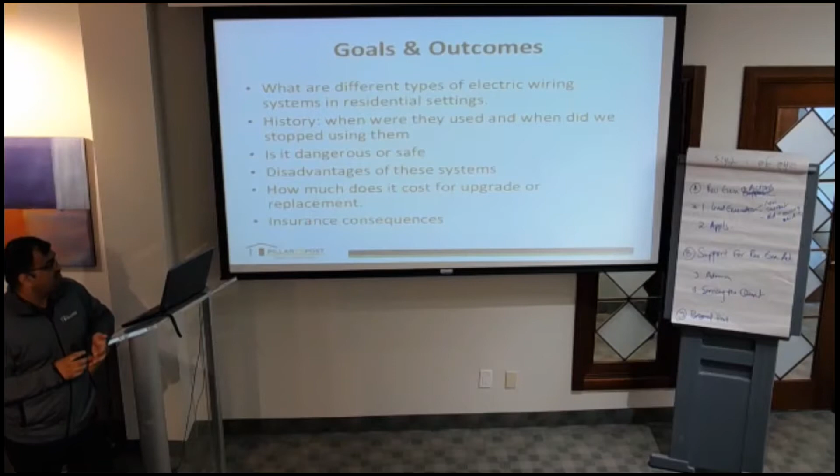The goals and outcomes are also mentioned on one of the sheets in front of you. These are the things we are going to cover today: we are going to talk about different types of electric wiring, dig a little into the history of wiring, the different types, which one is safe, what are the insurance consequences of them, and what are some of the disadvantages of different systems. I will also try to touch on the cost of upgrade, replacement, or maintenance.

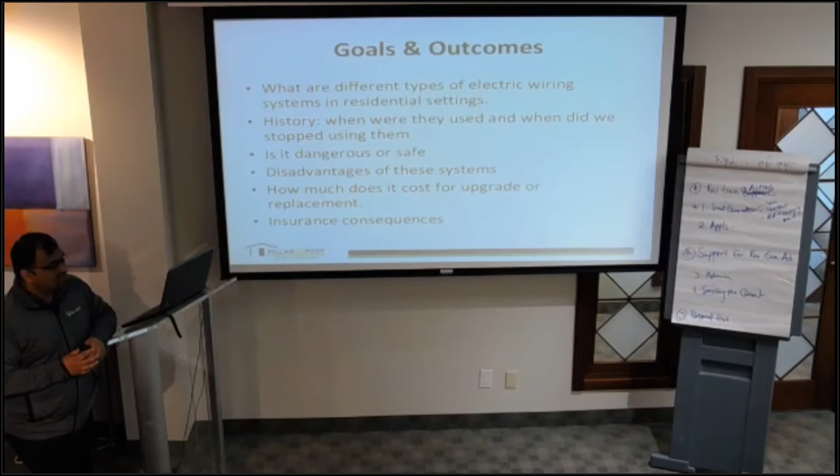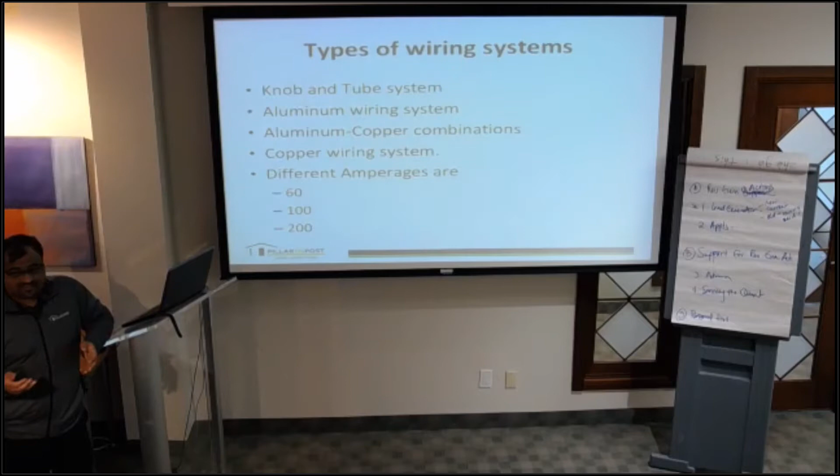So typically in a residential setting, we have knob and tube systems, we'll go into detail about that. We have aluminum wiring systems, and there's a combination of aluminum and copper, we'll talk about why that is dangerous as well. The copper wiring system is probably the best system available out there, and about 70% of the homes in and around this area have copper wiring. That is the new norm, what most new constructions have. Different amperages are 60, 100, 200. 60 is usually with knob and tube, and I've seen it in some copper wiring too, but mostly in subdivision homes it's either 100 or 200.

So, knob and tube wiring. It's an old system, and that was a standardized method of electrical wiring. If you ever happen to see a century home, you are more than likely to see knob and tube wiring in there. That may have been upgraded to copper wiring and a breaker panel, but it doesn't mean it has been. There are a lot of things to look for, especially when you go into a century home.

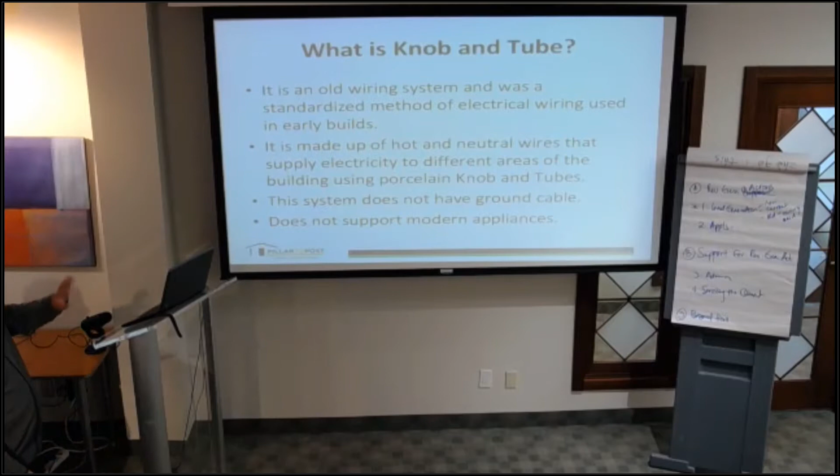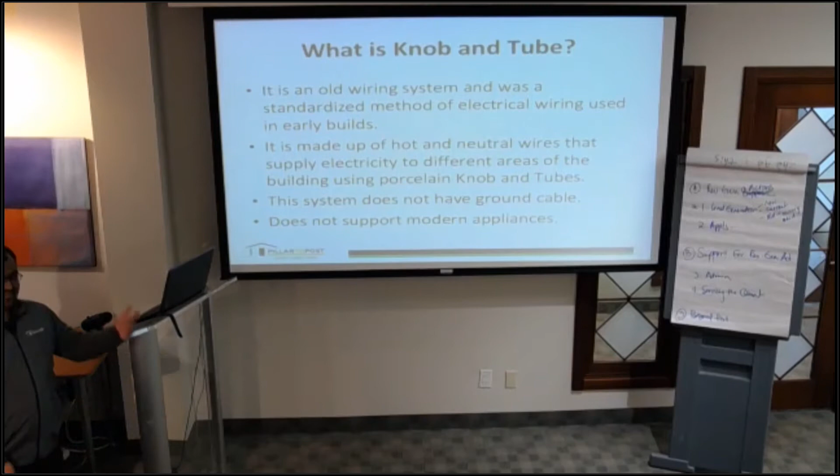This wiring system is basically made up of two parallel open wires, hot and neutral, and they supply electricity to different areas of the house. Some of the issues with that system: number one, they do not have a ground cable, so there is no grounding, which obviously is a problem. And that system does not support modern appliances, so if you have TVs like the new flat screen TVs, printers, or other modern appliances, this system is not going to support that.

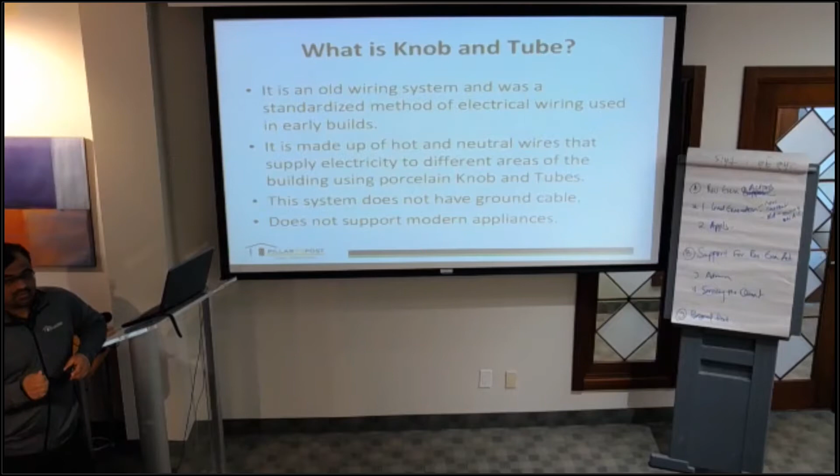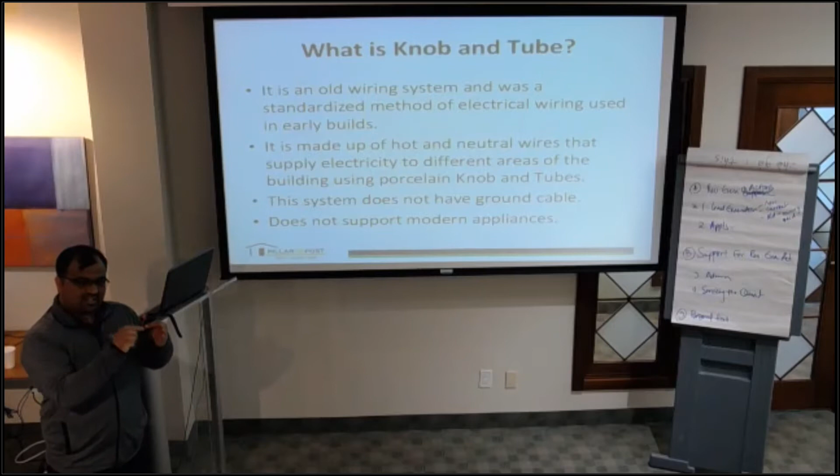So even if you plug in a printer, it doesn't work? Anything that has a grounding cable will not work with this system. If the plug has three prongs, then it's not going to work. If it has two prongs, or if somehow you could get rid of the grounding cable and plug in two prongs, yes it would work, but it's risky.

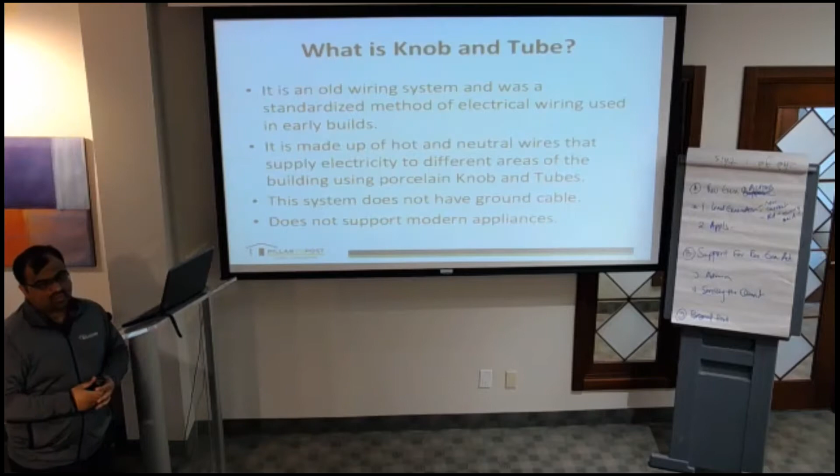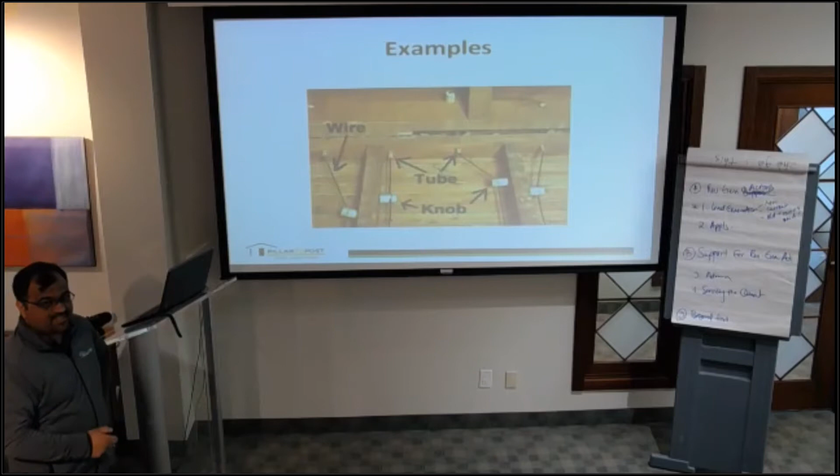All right, so these are some of the examples, you can see them over here. These are the knobs, and these are the tubes. The knob basically takes the wire along the length of the floor joists, whereas the tubes cut through the joist and take the wire to the next segment. That's how they are wired, usually in the basement. If you go into a century home with an unfinished basement, you would see something like this.

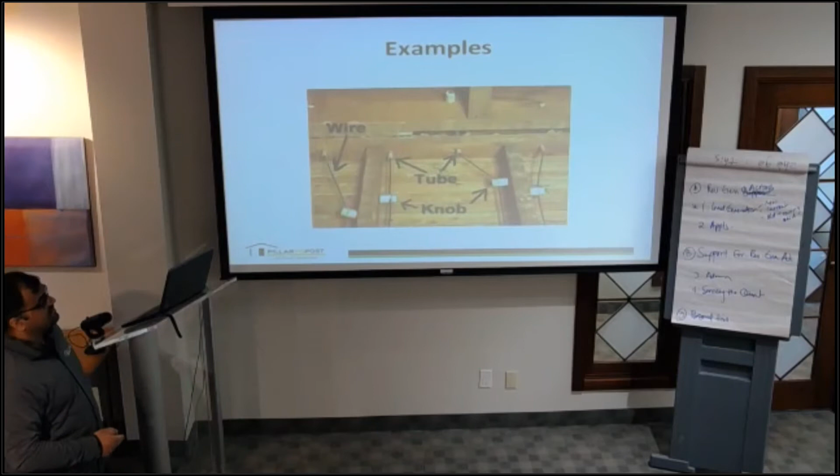This is knob and tube wiring, a typical example in an industrial setting. This is basically a farmhouse, and even now, knob and tube wiring is very common in farmhouses and big sheds, because this is very cheap to do. That's why they do it, and it's very easy to maintain as well.

So what's the maximum amperage for knob and tube? Usually 60, not more than that. I haven't seen any at 100, so it's usually 60.

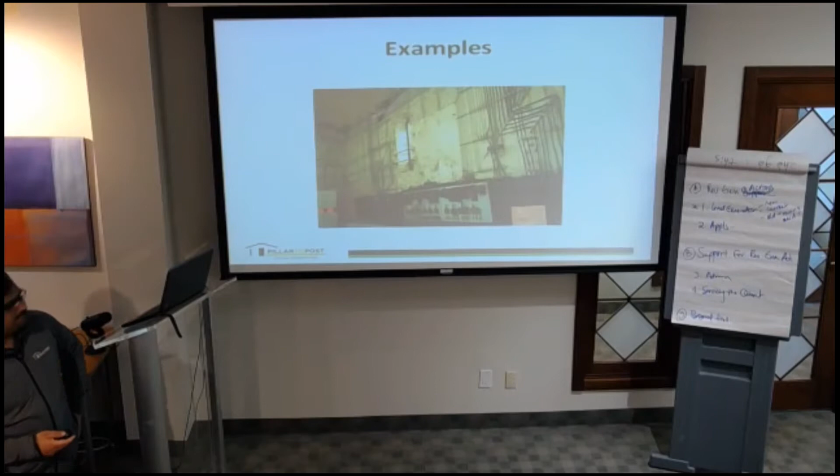So this is another example. Like I was saying, these are the knobs that connect the wires, and these are the tubes that go through the floor joists, and that's how they supply electricity to the whole house. This is a hot wire, this is a neutral wire, and this is the connection. So it was a very simple system.

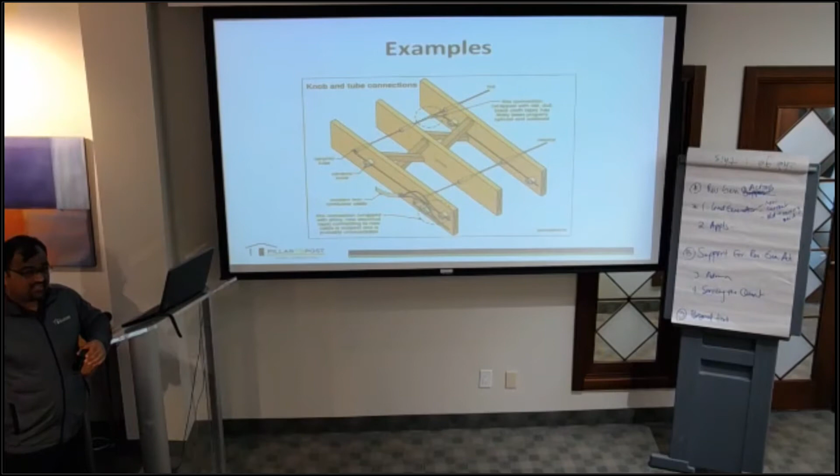It was very easy to maintain, but it was back in those days when there wasn't much requirement of power. It was usually just one receptacle per room.

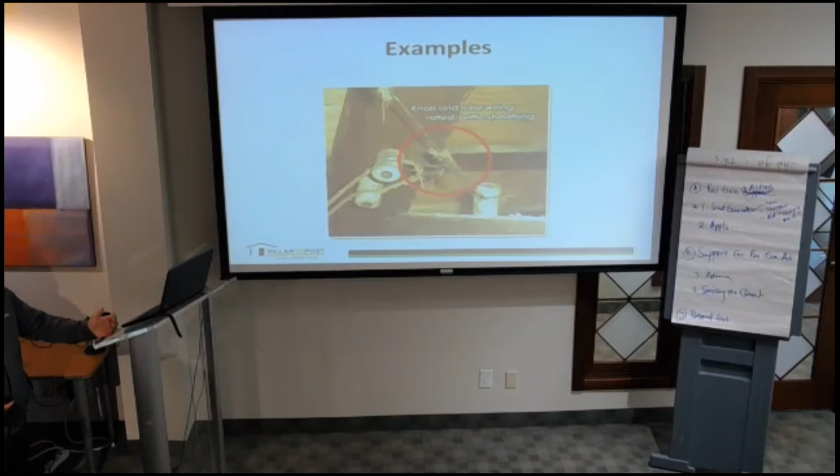So this is another example. Somebody has tried to use tape to cover the live wire, which is never a good idea to do, because this can trigger a fire right away.

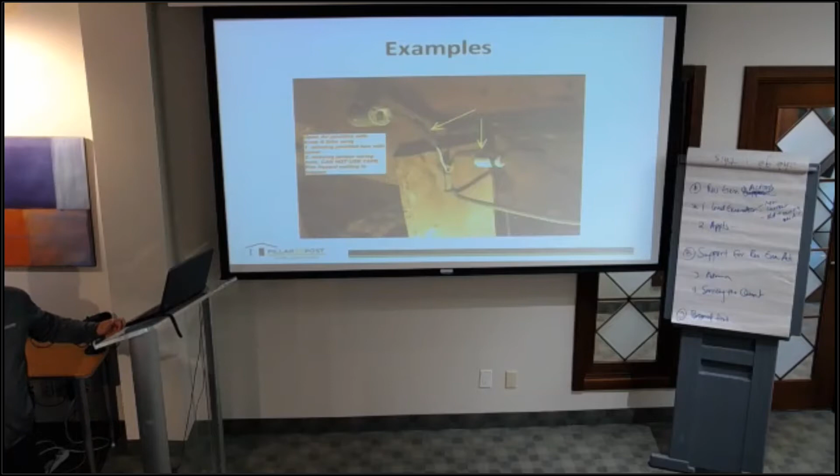But some tapes are electrical tapes. Electrical tape is different, you can use electrical tape, but it's not recommended, plus it's only the electrician's job to use electrical tape. But if you use plastic tape or duct tape, no, absolutely no.

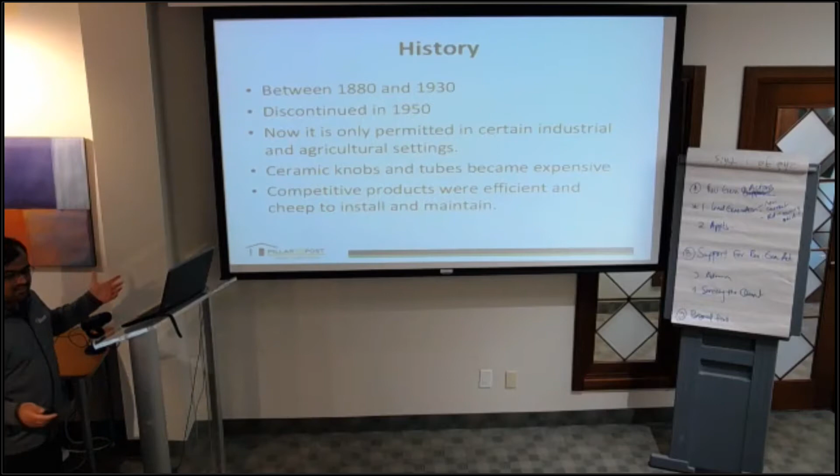So a little bit about the history of knob and tube. It was used between 1880 and 1930, and it was discontinued in 1950. So that is usually the time frame. If you go into a house which was built in the 1930s, 40s, or 20s, you would see knob and tube wiring.

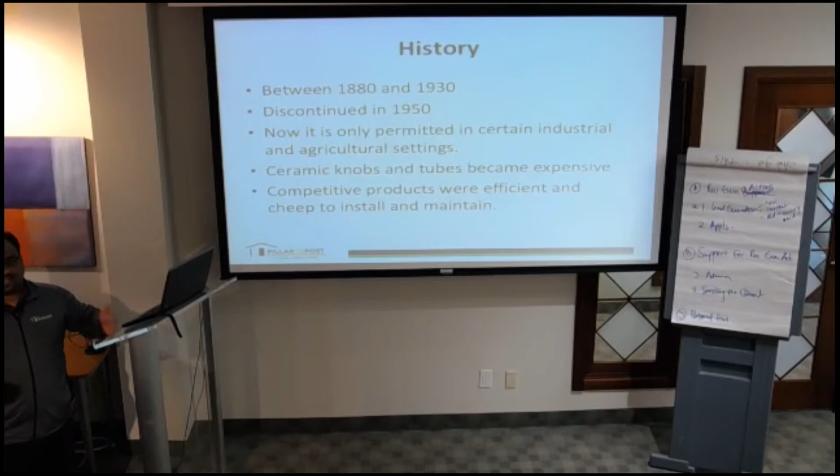You can go into the basement and see those knobs and tubes hanging around. Even if the house has been upgraded to a breaker panel and aluminum wiring, you would still see some knobs and tubes because they are embedded into the floor joists, so they are easy to see. But if you see that situation, you know the house has been upgraded, and you can get the certificate and all those things.

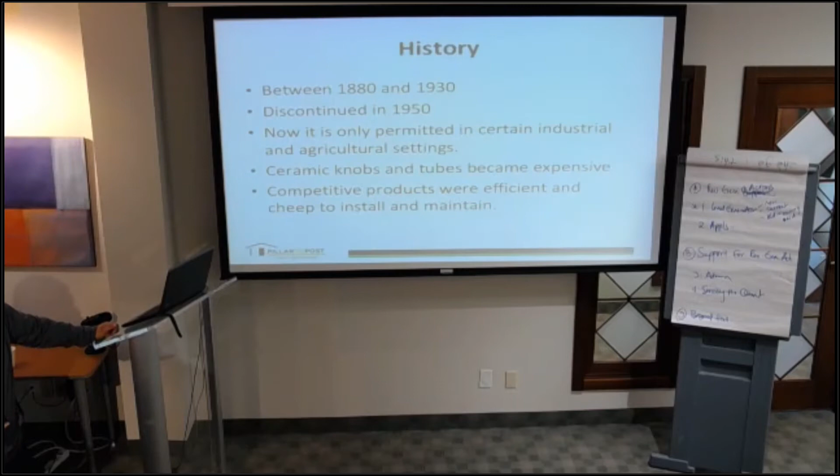It is only permitted in certain industrial and agricultural settings. It's very difficult and very expensive to maintain. Those ceramic knobs and tubes are very expensive, and that's why they were phased out and are not in use anymore. The competitive products were very readily available, cheap to maintain and install, plus electricians prefer something that is safe.

So some of the disadvantages of the system: they do not have a safety ground, the grounding cable, and it can get damaged during building renovations.

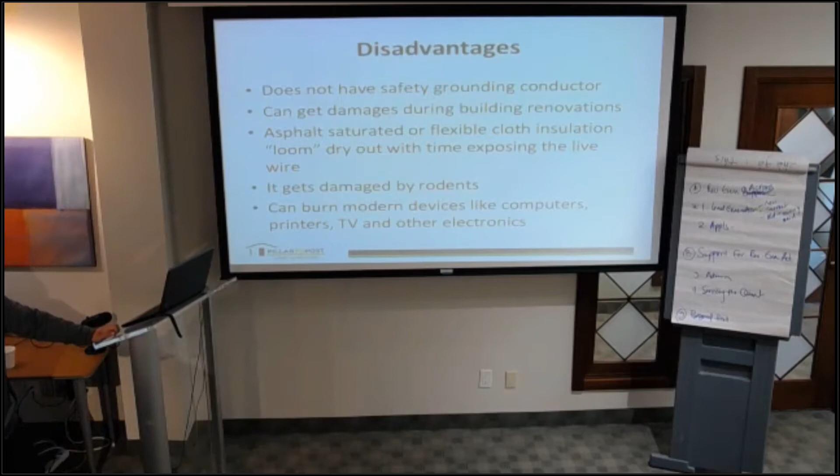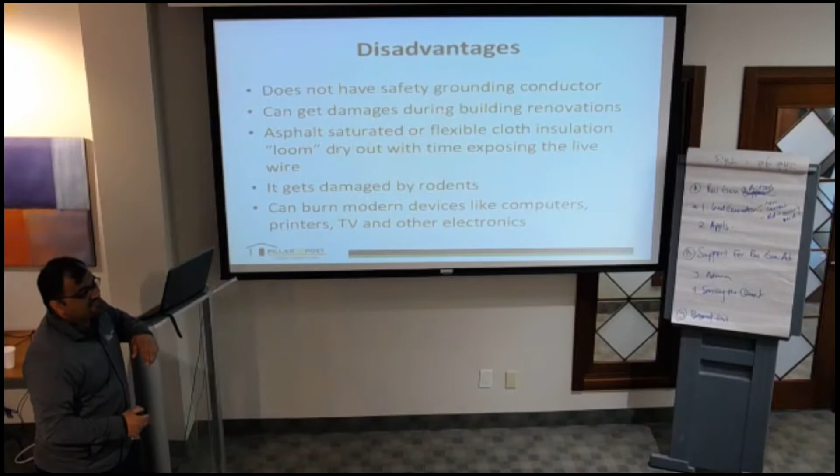It gets damaged by rodents, so that's another issue. And like I said, modern appliances like computers, TVs, and printers are not supported by this system. The old homes have their own charms, but they have their limitations as well.

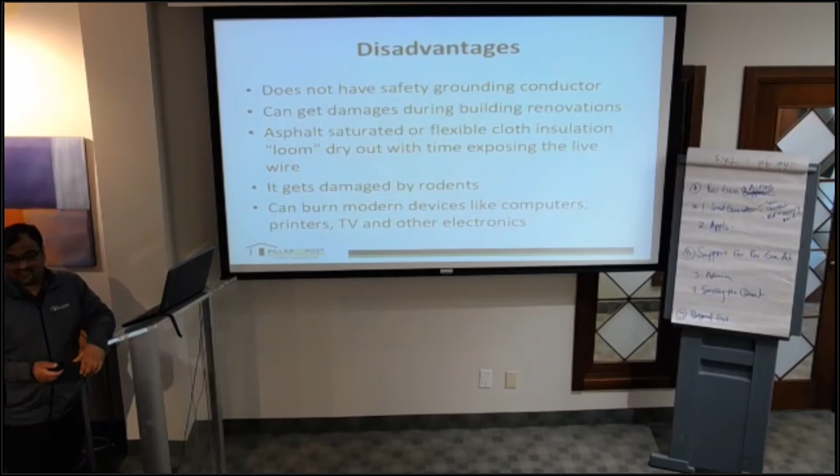Some of the other disadvantages are that there are only a few branch circuits, fewer than needed. If you go to old homes, you would only see one receptacle per room. But now in modern homes, you see like 10 receptacles in one room because you need more power on almost every corner: cell phones to charge, printers, computers, and whatnot.

One of the things that is probably the biggest disadvantage is the magnetic field that it creates inside the house. The live wire, if it is not covered properly with insulation, can create a magnetic field, which is not good for our health.

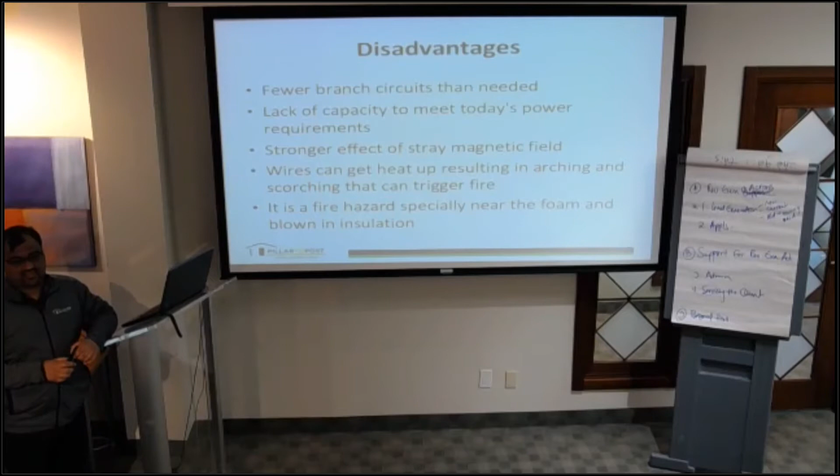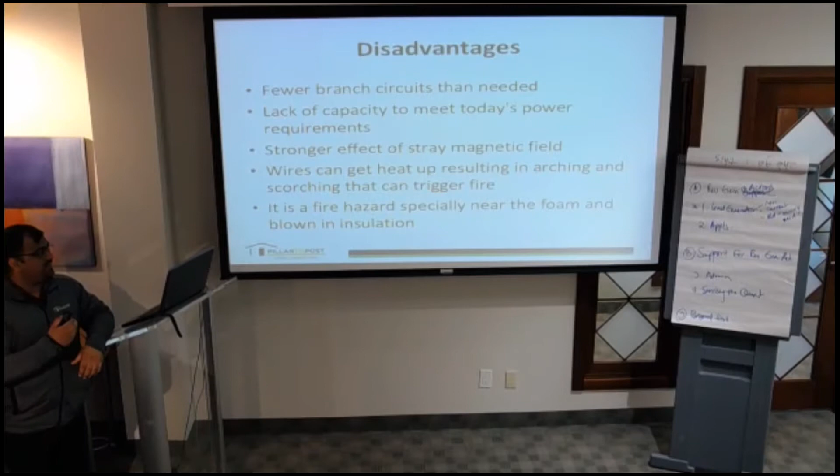A lot of people talk about these electromagnetic fields, especially if their homes are located where there are live wires, like heavy duty wires going in the backyard. A lot of people ask me these questions, if those wires have any issues or if there are any health consequences of those magnetic fields. So yeah, I mean this is something that you have in your house, so yeah, it has direct consequences.

It is a fire hazard, especially near the foam and blown-in insulation. So that's the issue that we see today. The insulation is usually blown in, and if you have knob and tube wiring running through your attic, then that can trigger a fire. It's a fire hazard.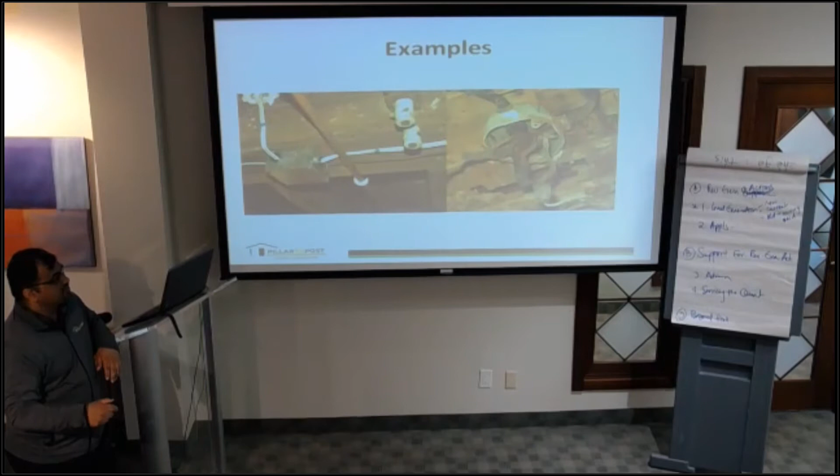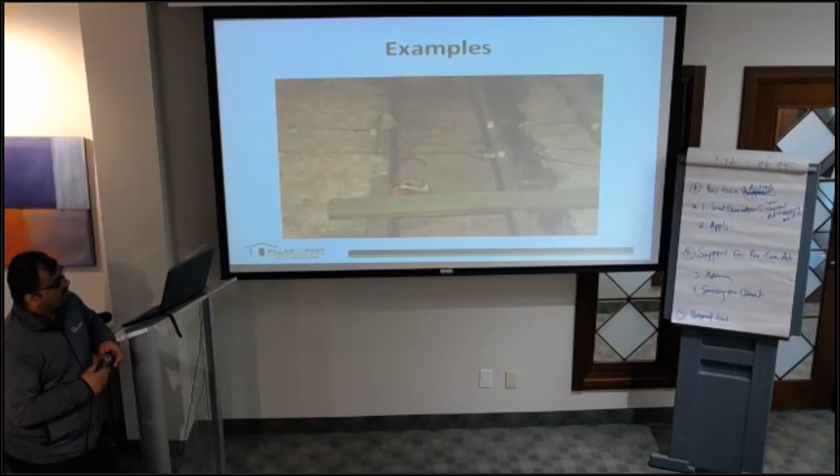This is what I was talking about when you have blown-in insulation in the attic and you have live wires running through it. This is a disaster waiting to happen. Is it asbestos? No, it's not asbestos. It's a blown-in fiberglass insulation.

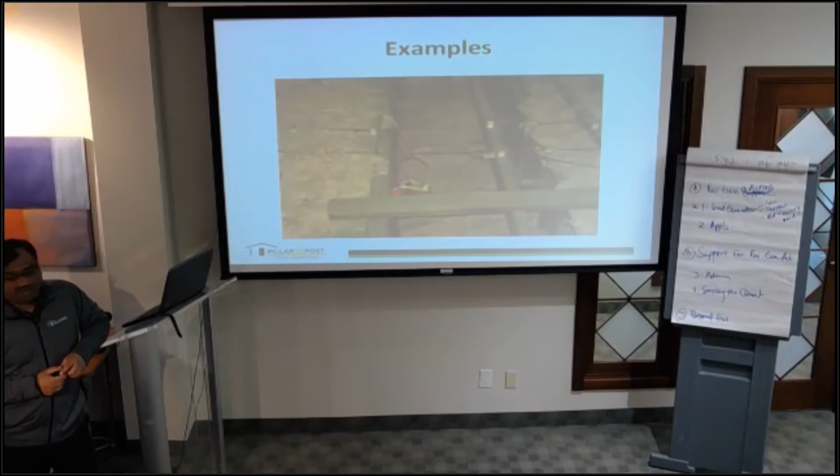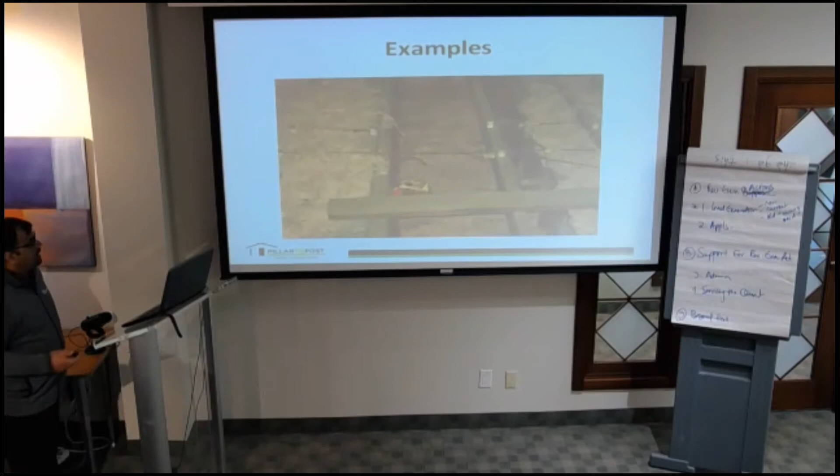That's good, let's dig into the cost of replacement. It's usually around $10,000 to $15,000 for a 2,000 square foot home. Century homes are usually bigger, so the cost usually runs into $20,000 to $30,000, and that is the replacement of the whole system from knob and tube to aluminum wiring. So they basically run new wires, they have to install a new panel, and obviously the branch circuit wiring is something that they also have to do because of the new wiring.

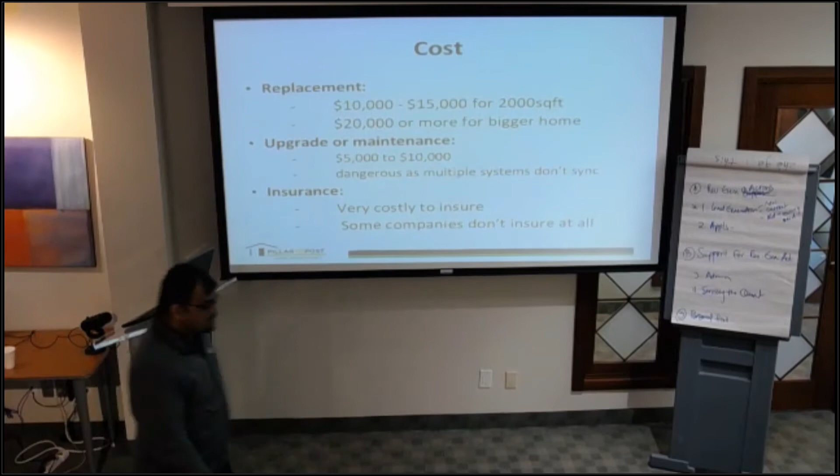So is that including disposal of the old system, or only replacement? It's just a replacement, that should be $20,000. Correct, correct.

Something about the upgrade and maintenance. Sometimes I have seen in some homes that what people do is basically leave the knob and tube as is, and they add a layer of aluminum wiring on top of it. So some of the bedrooms, for example, will get aluminum wiring, while the basement still has knob and tube. So that's like an overlap of different systems. Now that is very dangerous to do, because these systems usually do not sync. So if people think that they have a partial upgrade to a new system, but that's really not the case, the bottleneck is still the knob and tube system that you have in the house. So if you are replacing, you have to replace the whole system. You should not do it in patches.

And as a realtor, if you go into a house and you see wires that are going through the floor joists, and you see a new panel and you see new wires as well, the first thing that should come to your mind is, is it a two-system overlap? Because that is usually dangerous. But if it has been removed properly and the new system has been put in place and the old wires have been taken off, then yes, that's an acceptable system.

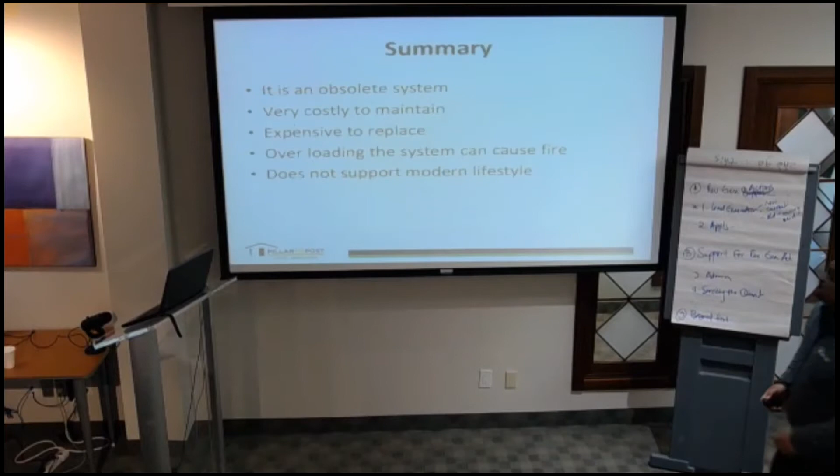So yeah, summary about knob and tube wiring. It's an obsolete system. It's very costly to maintain, expensive to replace. Overloading can cause the system to fail, and obviously can cause fire as well. And obviously this also doesn't support the modern lifestyle.

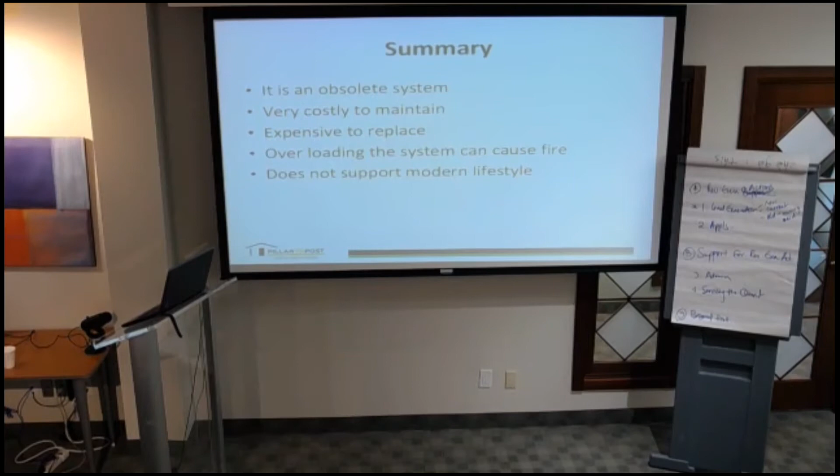How many of you have ever come across knob and tube? You said you have. Yeah. Downtown, there's like... Downtown, yeah, exactly. Anyone that's worked downtown, that's one thing you have to be careful about. Well, I have found quite a few of them actually up north as well. So the old homes, like the century homes, almost all of them have knob and tube wiring. Okay.

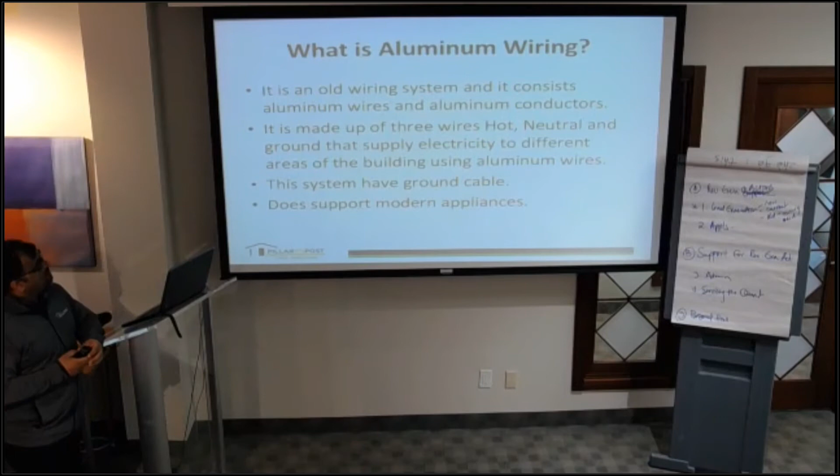So we are on time. Let's dig into the aluminum wiring. Okay, so this is also an old system, but it's still in use. You can still find aluminum wiring in many homes. So basically, the system consists of aluminum wires and aluminum conductors. They are made up of 3 wires: there's a hot, there is neutral, and then there is a ground cable. So it is obviously a better system. And the aluminum wires basically supply the electricity throughout the house. Now, like I said, this system is better than knob and tube because it has a grounding cable, and it does support the modern appliances.

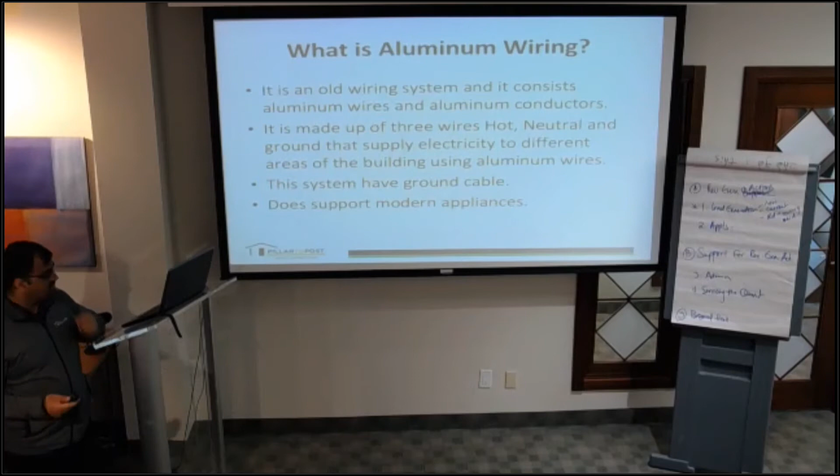However, this system also has a lot of limitations. Excuse me. But let's dig into the history a little bit, because we need to understand why this was put in place in the first place. So back in the 1960s and 70s, this is a system that was used at that time. And the reason for aluminum wiring was because copper was expensive.

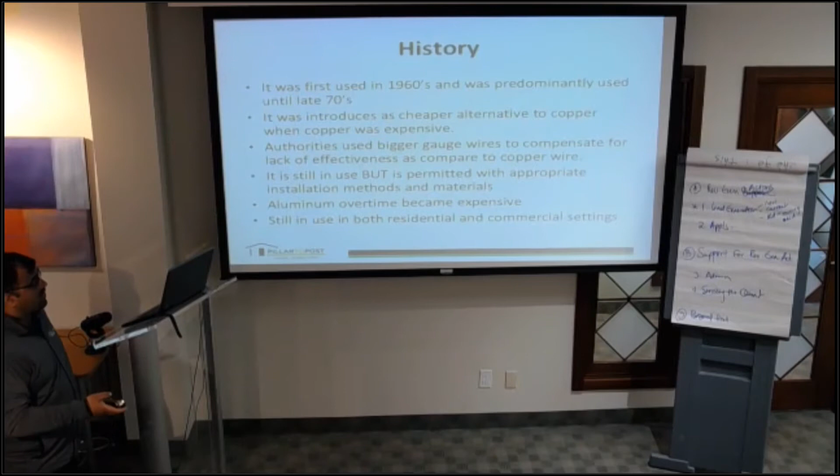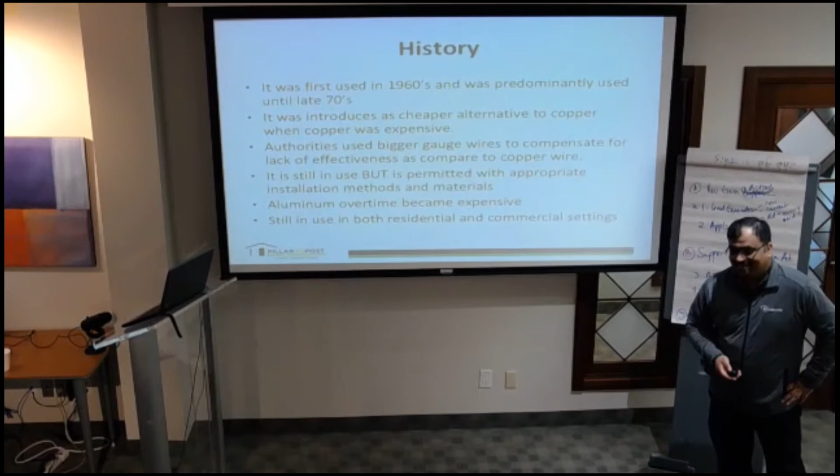From back in the day, from the early 1900s, all the electricians agree. Well, it's a proven fact that copper is a much better conductor of electricity than aluminum. But they had to replace it with something because copper was very expensive. So aluminum came out as a very nice alternative. And there were a few issues. For example, they had to use bigger gauge wires. So instead of using a 14 gauge wire, they had to use 12 or 10. Oh, by the way, 12 and 10 is a bigger gauge than 14. It's the other way around in gauges. And so they were trying to get the same effectiveness out of a bigger gauge wire.

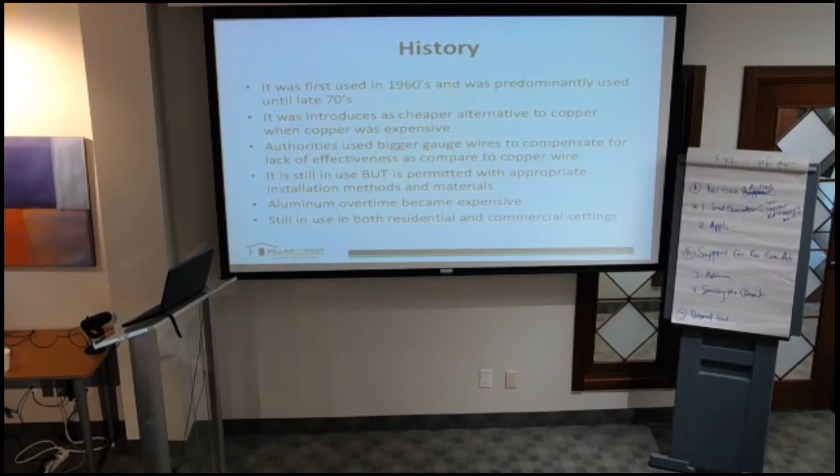It is still in use, but it's permitted with the appropriate installation methods and materials. So this is very important, and this is what we are going to talk about today. What are the installation methods that we have to follow, and what are the materials that have to be used in the aluminum wiring, because there are consequences. If they are not done properly, then obviously there are a lot of consequences: insurance, cost, a few other things that we're going to discuss.

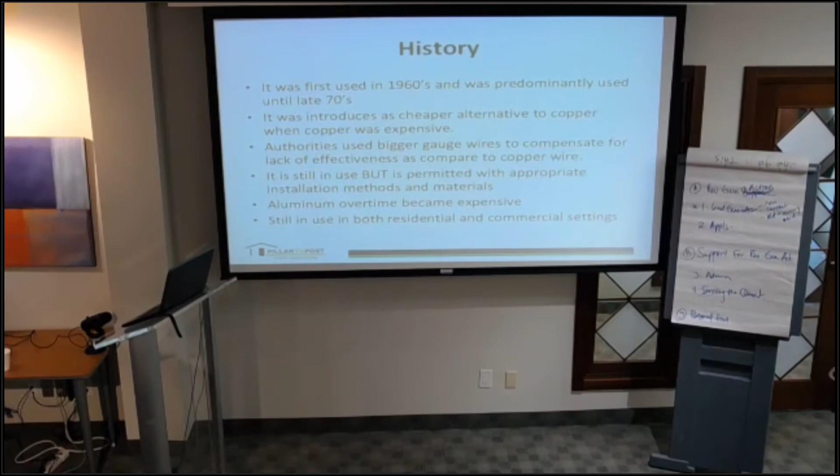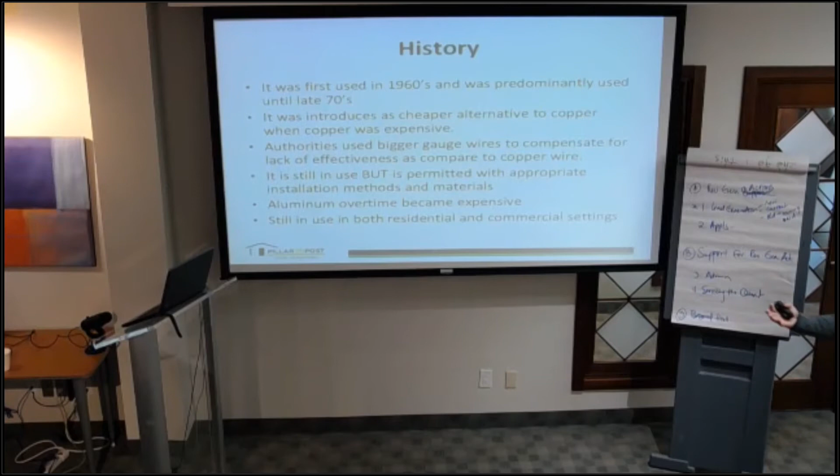A couple of other points. Aluminum over time became expensive, so we don't use that anymore. Well, sometimes we do, especially in commercial settings, because if you have to transport electricity from point A to point B, and point A and point B are far from each other, like the electrical hubs. So aluminum is an alternative which has already been installed. So instead of upgrading everything to copper, they just continue to use those aluminum wires that are stretched from one powerhouse to the other.

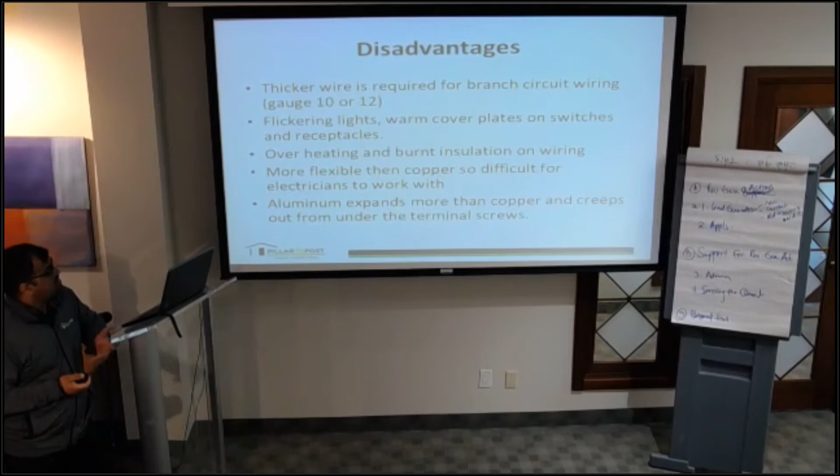So some of the disadvantages: like I said, we have to use a thicker wire, so it's usually 10 or 12. I will show you some examples as well. What does that mean? Usually the copper wire used in branch circuit wiring is 14 gauge. Over here, we have to use either 12 or 10. Flickering lights, warm cover plates on switches and receptacles. Now, these are the issues that started coming up in the early 70s.

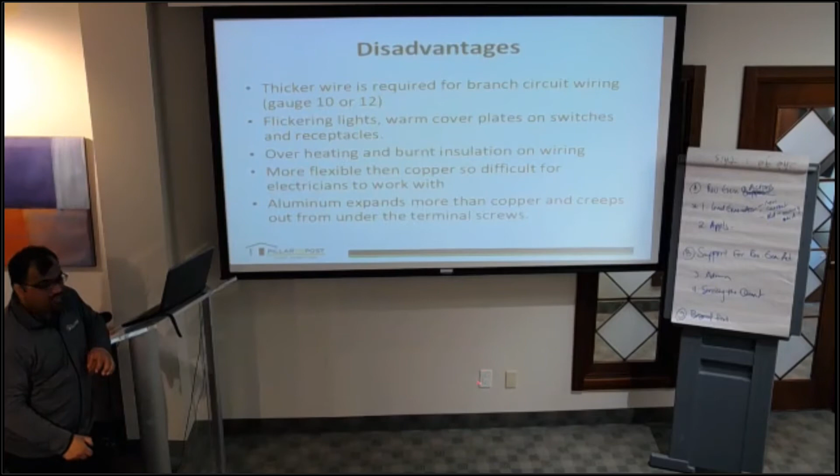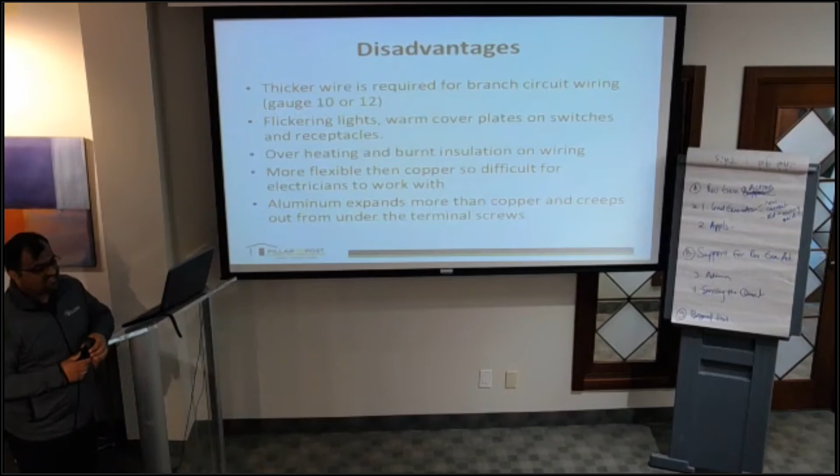When systems were overloaded, the consumer needed more power, and they started putting in... so for example, this receptacle that we have over here has 3 prongs, and you can plug in 2 things in it. But you may have seen a lot of people plugging in the 6 receptacle one. Which one? Yeah, this is an extension. So you use an extension, you use other things. So with these things, if it is aluminum wiring, it would heat up. Cause of fire. That can cause fire. Yes.

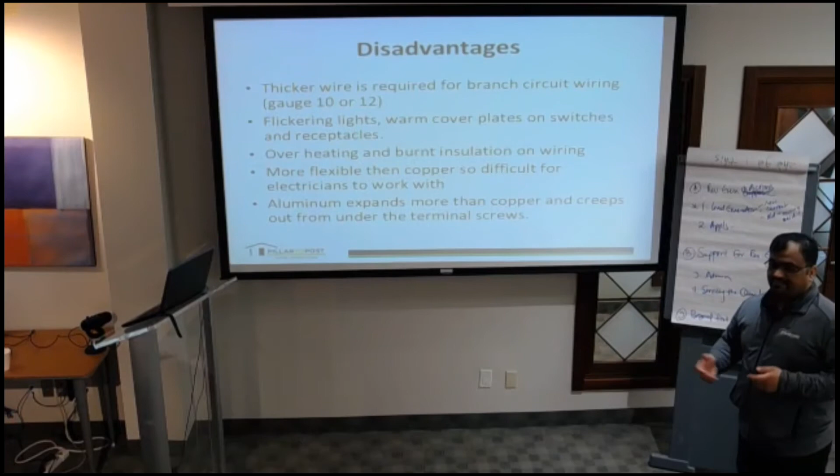So what are the flickering lights? Light flickering, like on and off. Okay. So is that because it was overheating and causing like a break in the circuit? Kind of, yes, I'm gonna talk about that. So aluminum expands, and that creates a little bit of gap at the connections. So the connection is not perfect, and that's why the electricity is not flowing as fluently as it should be, and the lack of amperage caused the flickering.

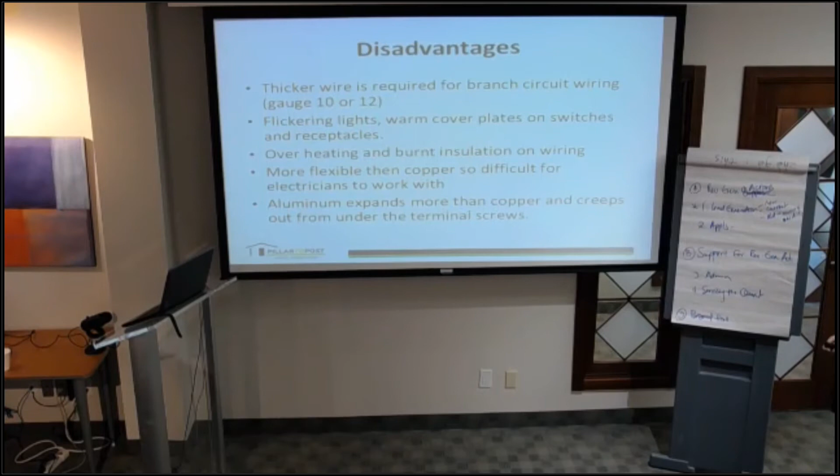So could that technically spark? It can cause a spark, yes. And I will show you some examples as well, what can happen. And that's the reason why it is not a good kind of wiring to have. Okay, some of the disadvantages is aluminum oxide, which is rust that develops over time, and that interferes with the flow of electricity. So that is one thing that also results in flickering lights.

The two system overlap, which is joining aluminum and copper wires, can result in much oxidation, and obviously the connection gets poor with time, and it can again cause fire. The electrolyte causes galvanic corrosion that results in unstable connections over time. So if you have an aluminum wire coming to this receptacle, for example, and this receptacle is made up of copper, these two materials do not match. I mean, they do, but over time there's a corrosion, and that would result in the lack of amperage.

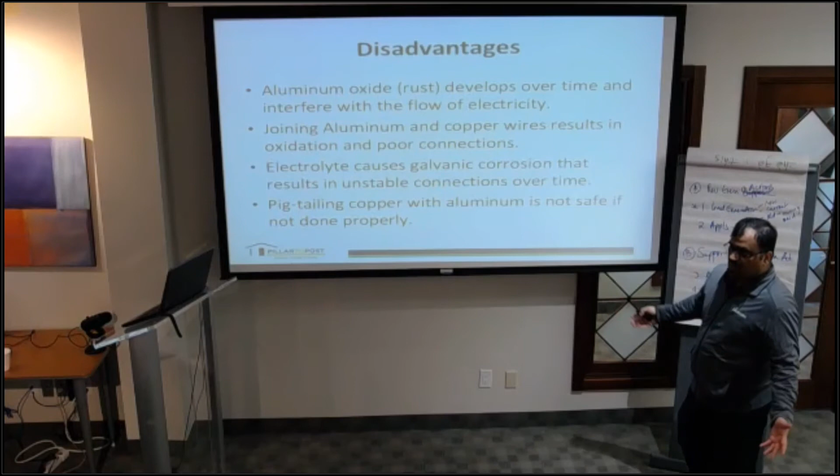So for example, this is designed for 15 amps, but over time you will not get 15, you will probably get 10 or maybe less, which means that you will not get the power which is required out of it. And eventually, if you overload that receptacle, it will become a hazard and can catch fire. One of the solutions that is done is called pigtailing, but some people start using copper and aluminum, which is obviously not safe to do if it's not done properly.

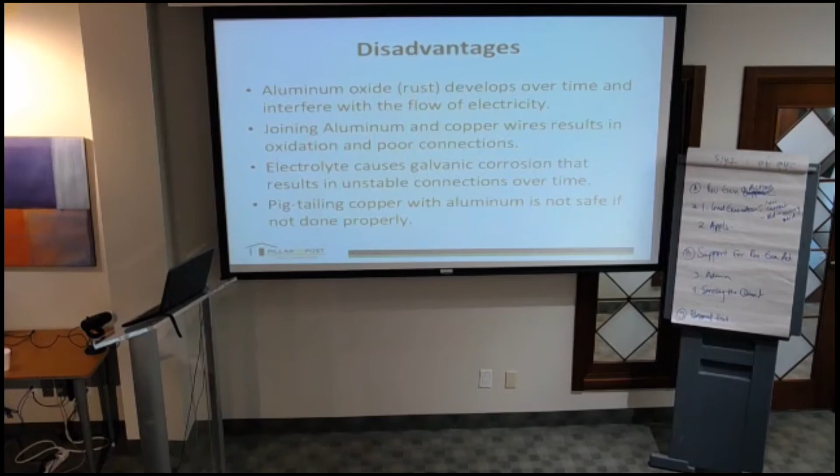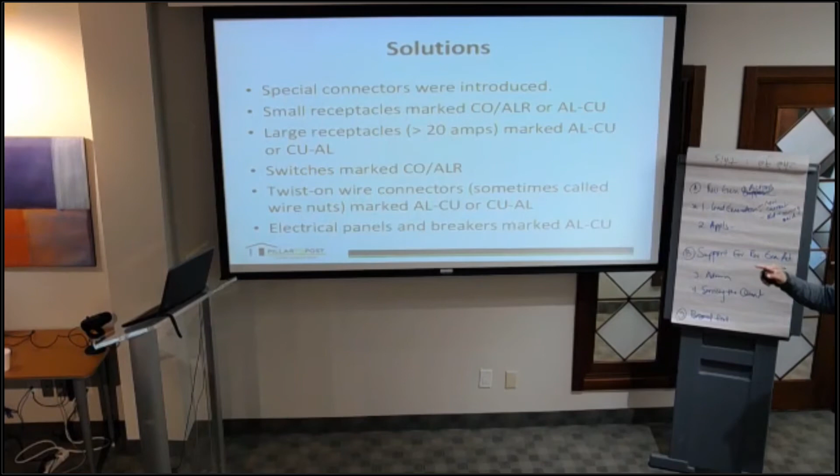Some twist-on wire connectors. They are also called wire nuts, and they are usually used for pigtailing, the term that we used in the previous slide. So that is a solution that electricians usually recommend if you have aluminum wiring in the house. But I would not go into the detail of that. It's a very technical thing to discuss. But from a realtor point of view, all you need to look for is anything that is marked with these signs. So if you see those, it means that there is either an aluminum copper combination or just aluminum inside the house.

Yes. You have a question? So that would be a safer situation. Correct. And you'd be more likely to be able to get insurance. Correct. Well, for insurance, there are some more requirements. I'm going to talk about that in the next slide. So there are a few more requirements that you have to do to get the insurance. Where do you see it on the switch? Oh, I have examples. I'll show you.

Another thing to look for is the electrical panel. So if you are going into a house with your client, you happen to go into the basement and have a look at the panel. If it is exposed, then you can see the breakers will be marked with ALCU. So that way you know that it's an aluminum copper combination. So those are the things to look for as a realtor. So what will it say if it's not a combination? If it's just copper, it won't say anything. Yeah, it will not be marked.

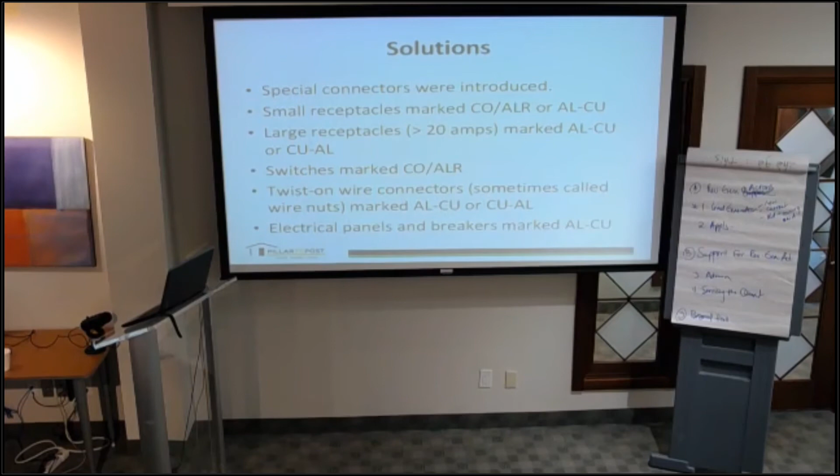Question. Let's say we have a house and this is a combination of aluminum and copper. Is it really bad if you replace it? No. It's not that bad, but it is bad. How bad it is, I'm going to talk about that. Some of the other solutions: one of the things is you have to get the ESA certificate. So coming to your point, in order to get the insurance, you have to have the certificate. If you do not have an ESA certificate, the insurance company is more likely to deny your insurance.

The Ontario Electrical Safety Code, or the code as we call it, was long established, but it has been updated over time. And now it requires every house that has aluminum wiring to have the ESA certificate. Otherwise, the house will not pass the electrical safety code. If there is an inspection from the city, the house will not pass that inspection unless they do the things that are required by the code and get the certificate.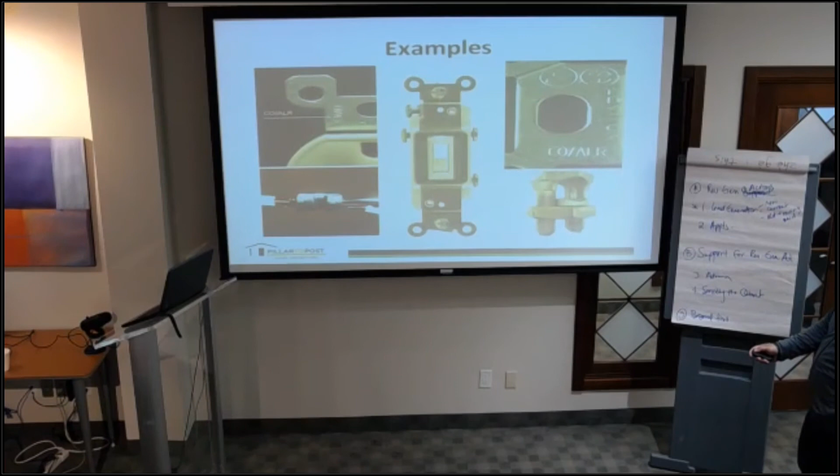Yeah. This is the nut, the wire. They are connected here. You can see that this one is connected with these three. It's called pigtailing. It's not a very good thing to do. And if somebody does it, they have to get the certificate, obviously. But this is a quick and dirty fix to aluminum issues.

Sorry. Yes. Shall we have access to those slides after finishing this class? Yeah, sure. They are with Mari. You can actually get them from her. Mari, yeah. You had a question.

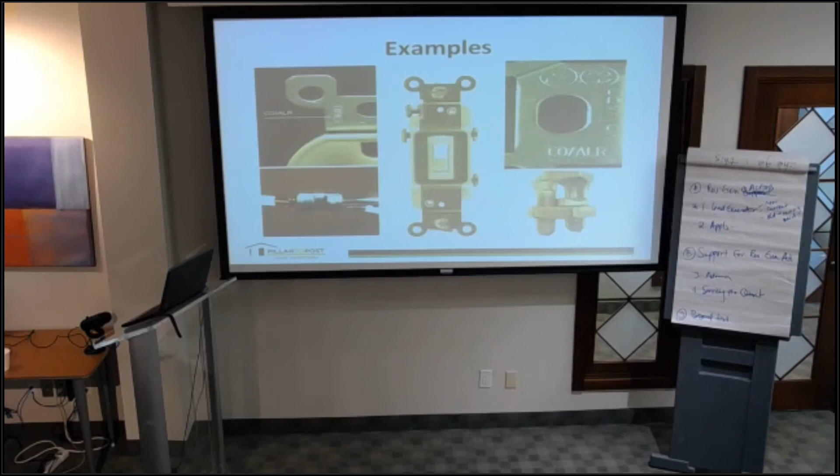All right, let's dig into the cost. This one is a little more expensive to replace. It's about $25,000 for a 2,000 square foot home, and more like $30,000 or more for a bigger home. It could be $300,000 if it's like a mansion or something. Sorry, that's a typo - it's $30,000.

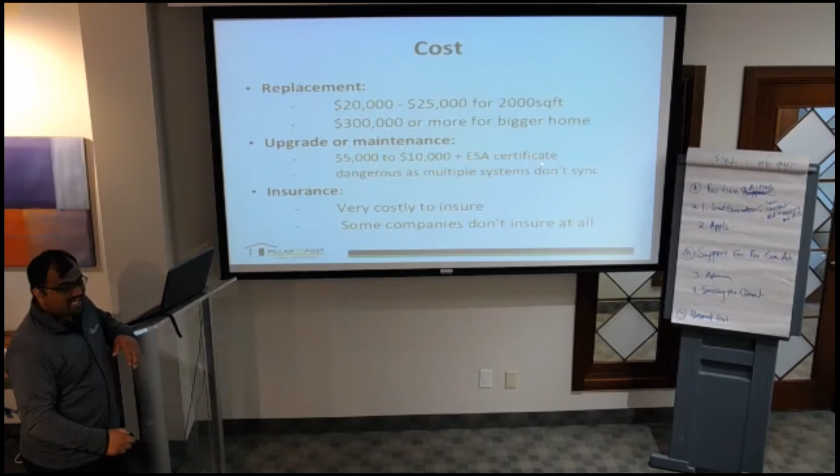One thing you could do with aluminum wiring, as opposed to knob and tube wiring, is upgrade or maintain it, plus you can get the ESA certificate and get insurance. So you can live with it. Coming back to your question - you have to fix the issues, which means installing new connectors, getting a safety inspection done, and getting the ESA certificate.

So if you go into a house where you know there is aluminum wiring, the first thing you should ask for is an ESA certificate. Does that have to come from ESA? Correct, correct. There's a cost associated with this certification. The house will be inspected thoroughly by an ESA electrician - they come, inspect it, take pictures, and give a certificate saying the house has been inspected and is safe.

Now, I have seen those certificates. Sometimes when they go in, they put that sticker on the breaker panel as well. So if you see a breaker panel with a sticker that says ESA certified, it means it has aluminum wiring, but it has been certified by ESA. So you have a level of comfort as opposed to going into a house with aluminum wiring and having nothing in your hand.

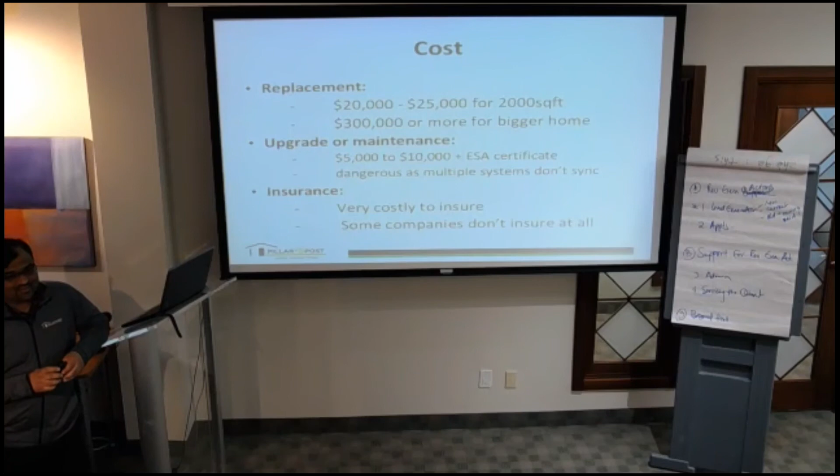Still, if you do that, it is costly to insure, and some companies do not insure even with the certificate. So yes, there are some issues with some companies - they would not insure, but you will still find some companies who would insure it, though obviously you have to shop around for that.

Any other questions with that? You said you had an experience with the pigtailing done by an electrician, the house with aluminum wiring. So you were able to get the insurance on that? Oh, it's no problem. Once they had the certificate, they had no problem.

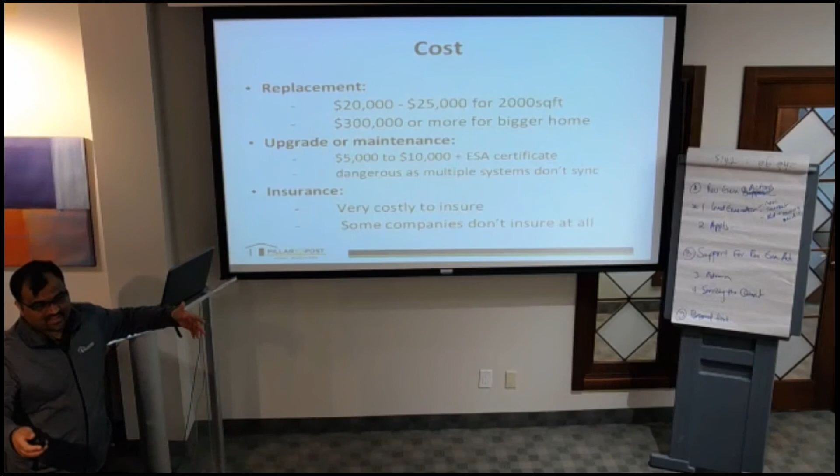Did they ask about the pigtail? Is it the insurance company? Well, the insurance company knows that if it is ESA certified, then the house has been inspected. That means it's been, when the house was built, they would know.

So they would ask. In the late 60s and 70s, that's the time. Older houses didn't have it, and newer houses don't have it. It's just that one period. So the insurance company knows - if they look at when the house was built, how old the house is, they know automatically.

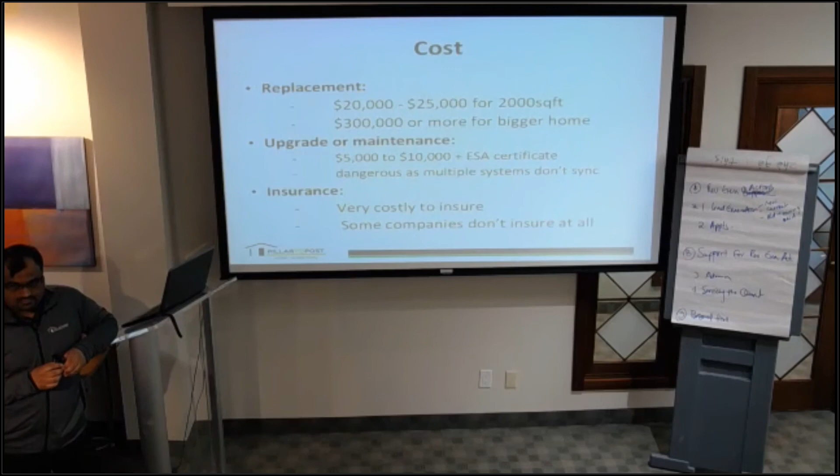Basically the houses here in Richmond Hill, almost anything behind Hillcrest Mall, all those houses are aluminum. I've actually inspected some of the properties and they've been upgraded to copper wiring as well. Yeah, some are upgraded.

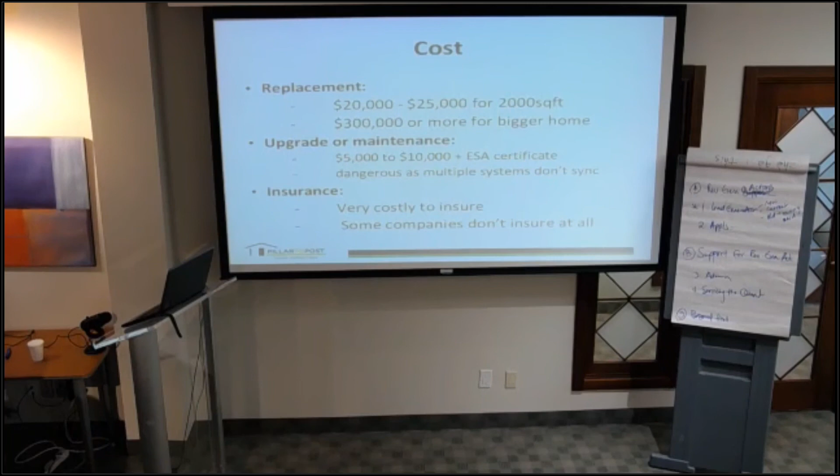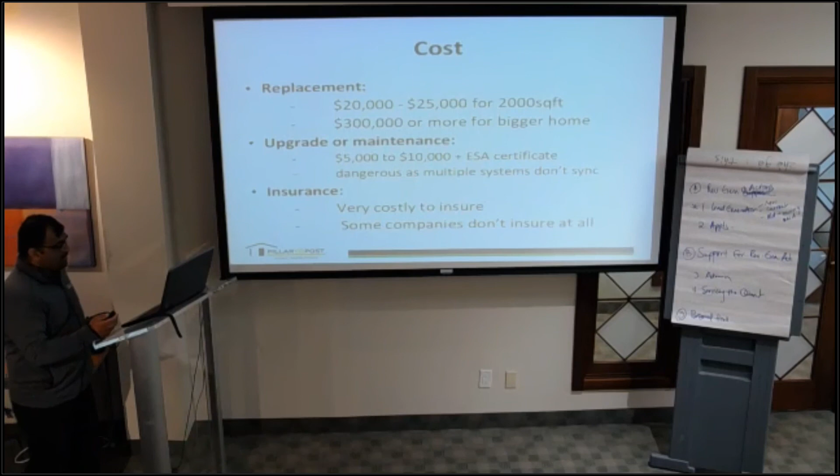All right, so next is the summary. Like I said, this is an acceptable system, obviously, because you can get insurance, you can live with it. But it is very costly to maintain. If something happens, you have to call in a certified electrician, and they have to do a lot of stuff to fix that issue.

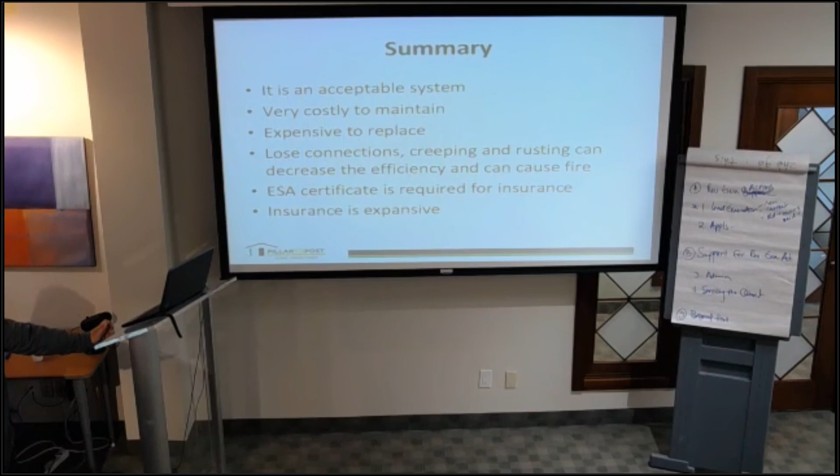Loose connections, creeping, rusting - these are some of the technical terms associated with aluminum wiring, and all of those things can happen and do affect the efficiency. They can obviously cause fire, and that's the reason insurance companies are reluctant to insure it. ESA certificate is required, and insurance is sometimes expensive. Now, coming back to your point, were you able to get a regular rate for insurance, or was it expensive?

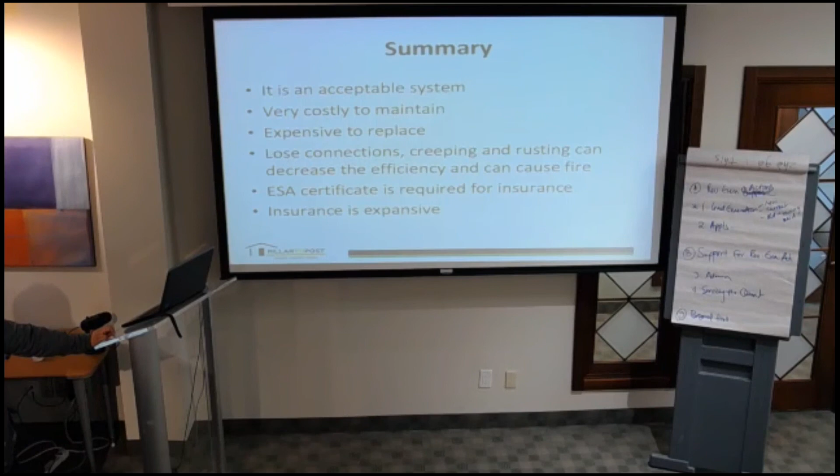I didn't compare, I don't know what it is. Well, I have done some comparisons, and it's usually, on a yearly basis, about $500 to $1,000 more. So it's a little expensive.

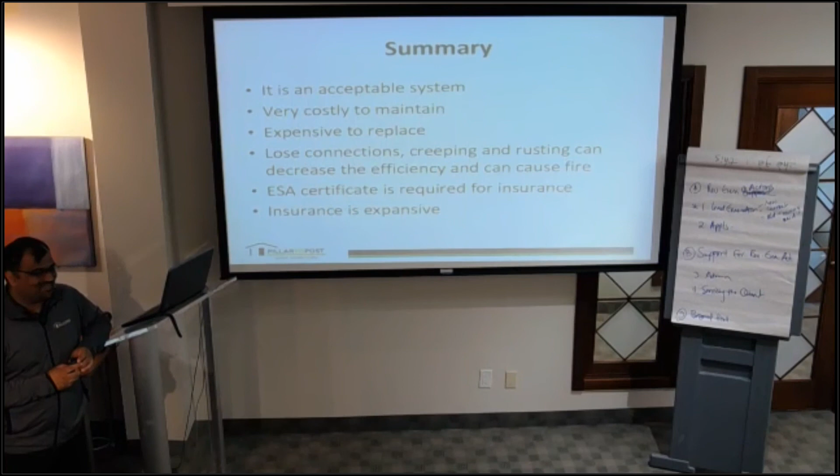Okay, any questions? Clear as well? Okay, all right, so that's pretty much about it. You guys have any questions generally about home inspections or my company or myself?

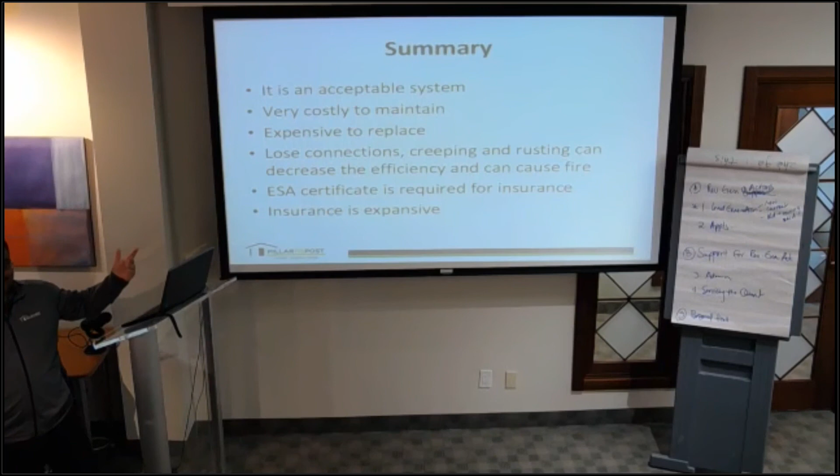Well, remember I told you this is a big company - we have more than 32 inspectors just inside the GTA. So if I can't do it, I will have somebody do it for you. How can we have access to your price range cost? Shoot me an email or give me a call.

Do you go by square footage? Correct, yes. So there's a guideline, obviously, that we have to follow from the company, but there's a variation depending on the area. If you ask me to go do an inspection in Huntsville or Muskoka or somewhere there, obviously you have to charge extra for that.

So what's your boundary, like is Brampton included? There is no boundary - I can do inspection anywhere in North America. No, but I mean, if I have a house for sale in Brampton and ask you to come, is there a surcharge because it's not GTA? No, Brampton is inside the GTA. So inside the GTA there's no extra charge. But if I have to go further, obviously you have to pay for the time, the gas, and the commute.